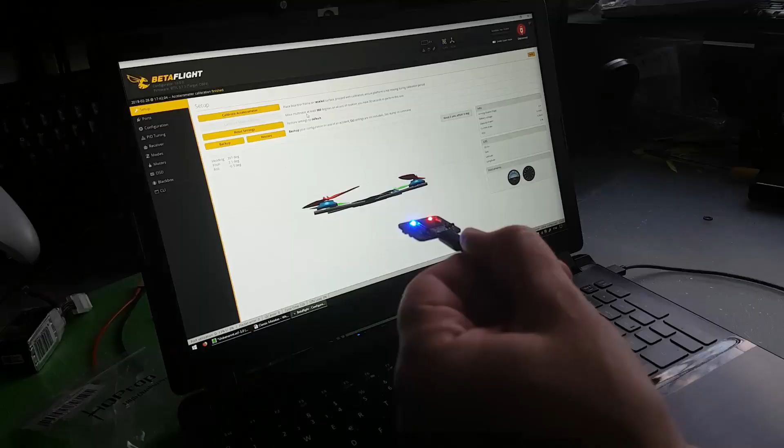Before I start with the build, I just want to make sure the FC is working correctly. Right now I'll begin with an overview of all the components I've used in this build.

I will try a whole series of different propellers. These one to begin with are the HQ props with 3-inch pitch and 4 blades.

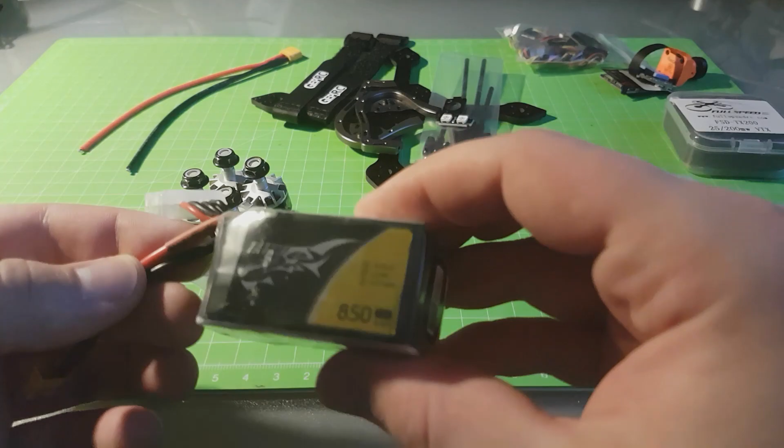These are the two 4S 850 mAh batteries. To connect these batteries I use this little XT30 connectors.

For the drivetrain I chose those Brotherhobby T1 1407 3600 kV motors.

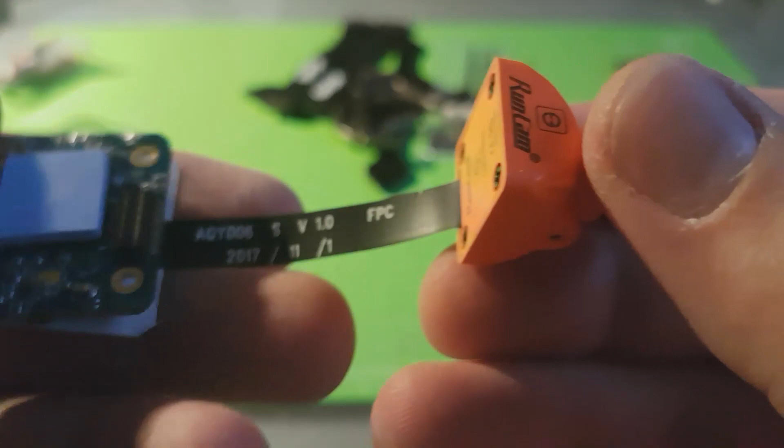The Runcam split mini is the part I'm most excited about. It's capable to record 1080p 60 and send the FPV feed while recording.

This is just a very cheap VTX I chose, the FSD TX200. Should be good enough.

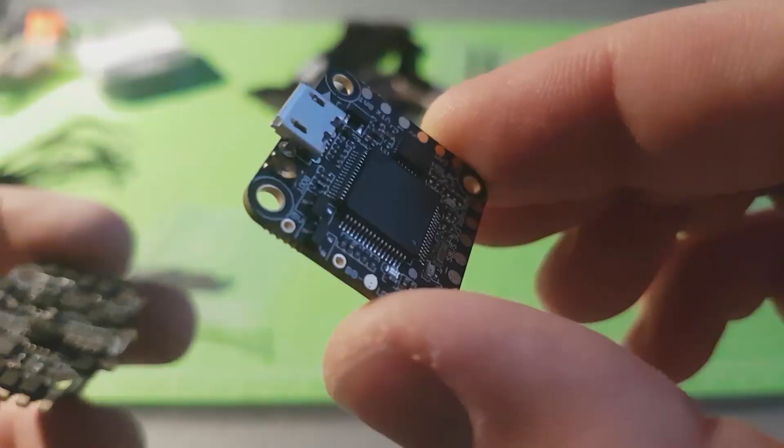For flight controller I chose to use one of those towers from HGLRC. This is basically an F4 flight controller with an integrated OSD and a 4-in-1 25 ampere ESC.

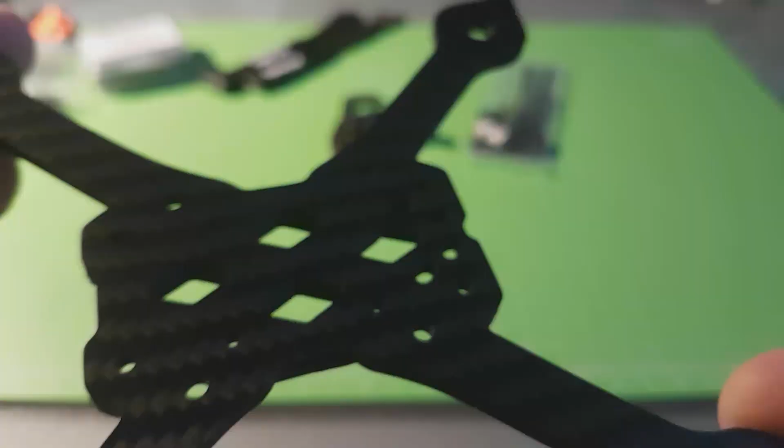The frame I used is, as said before, the GepRC MX3 Sparrow with a motor diagonal of 139mm.

It's always a good idea to start with putting some tin on the ESC connectors.

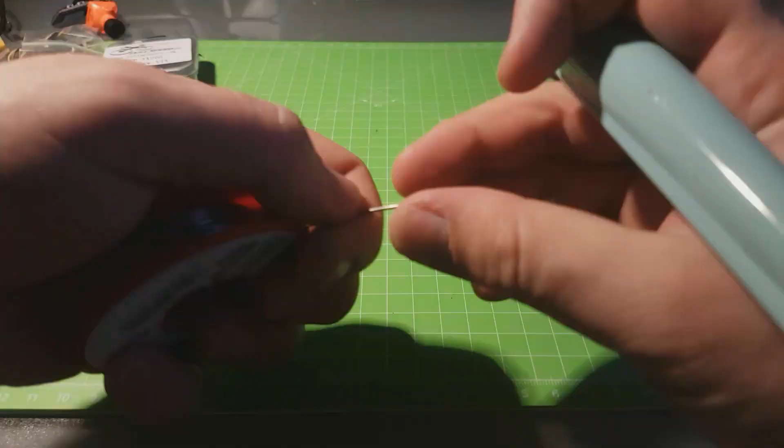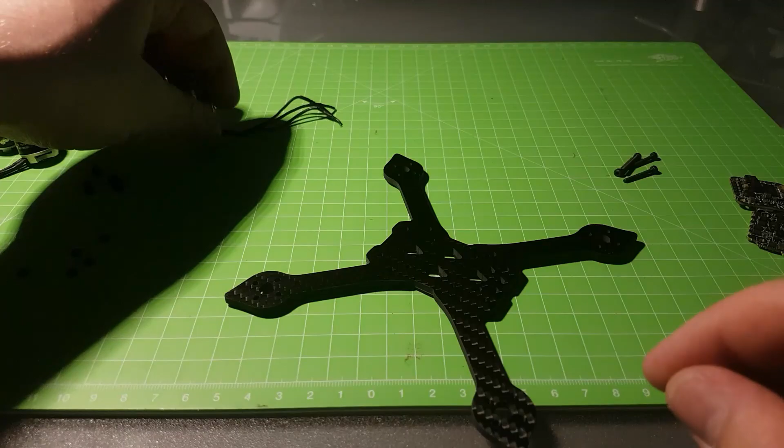After soldering I prepare everything to get the stack on the quadcopter frame. The next thing to do is screwing the motors on the frame.

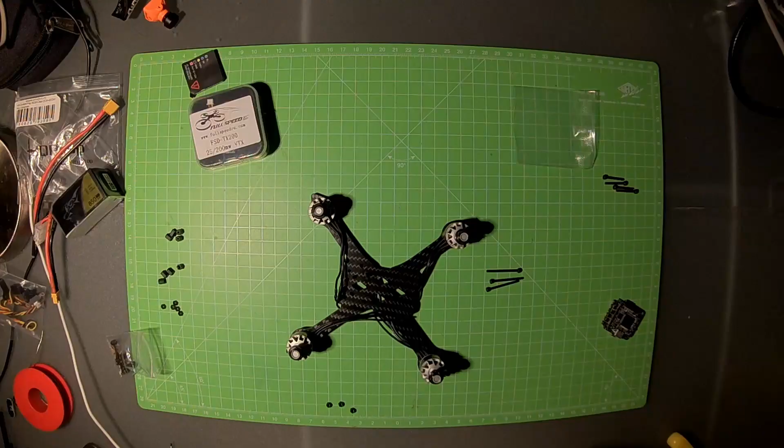With this screws we're holding the FC tower and the Runcam microboards. Hold the screws in place with this nylon nuts.

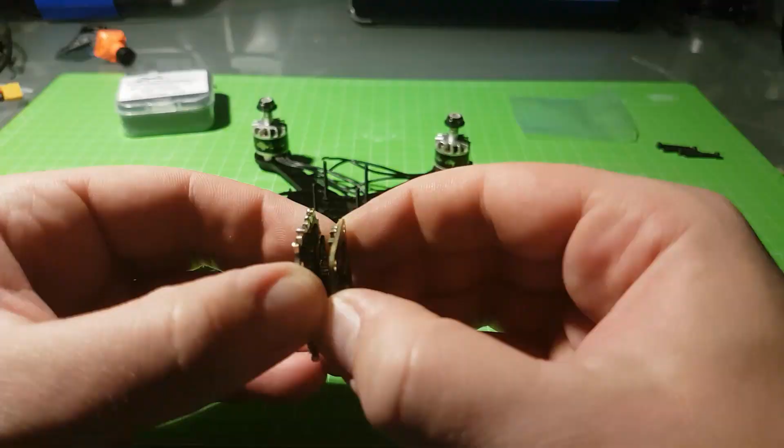When placing the ESC board you have to look out that the motor cables are long enough to reach every ESC pad.

After cutting the motor cables to the correct length, now we have to solder it to the ESC board. Just solder the cables like you want it. We can turn the motor direction afterwards in BLHeliSuite.

Next thing to do is connect all the other motor cables to the ESC pads.

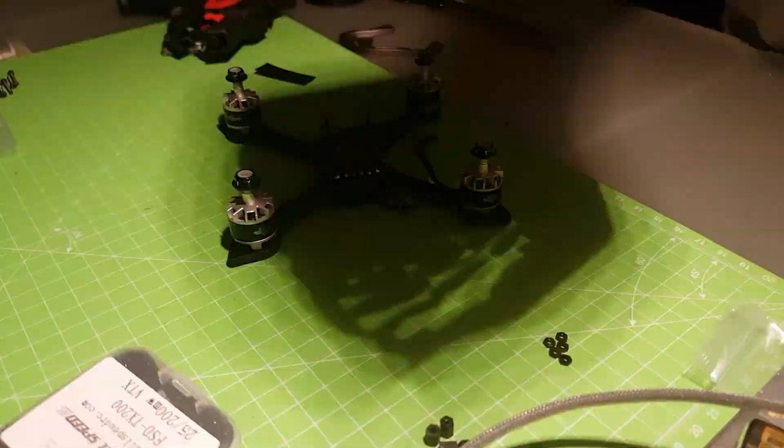Take the correct length for the battery cables and solder them onto the ESC board.

Place the flight controller and set up one part of the aluminium cage.

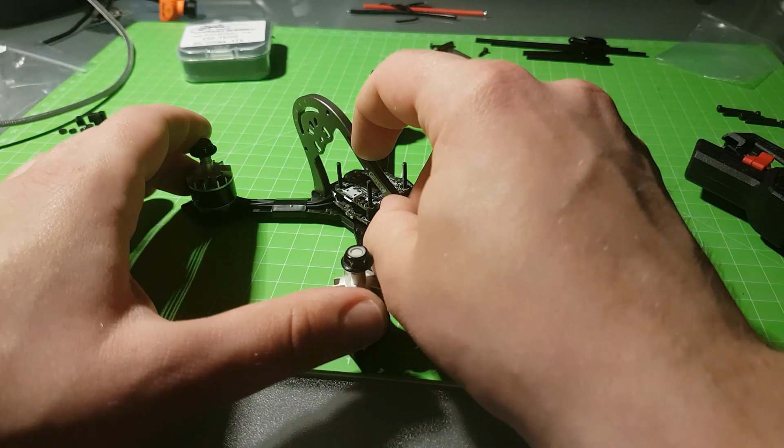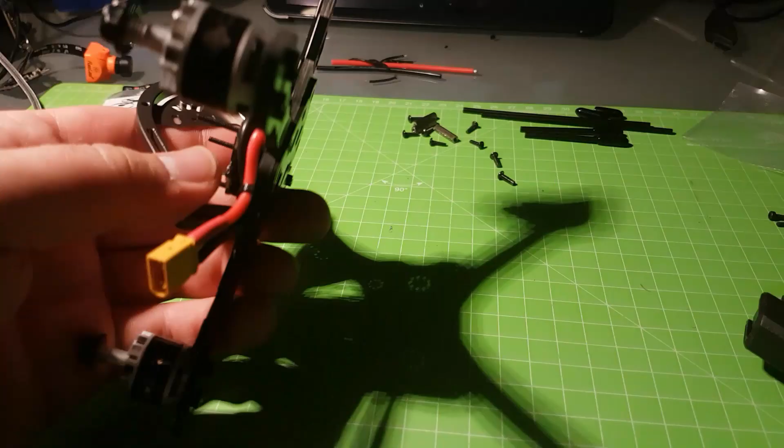Let's lay that quadcopter aside and have a look on the split mini and the VTX we're going to use for that build.

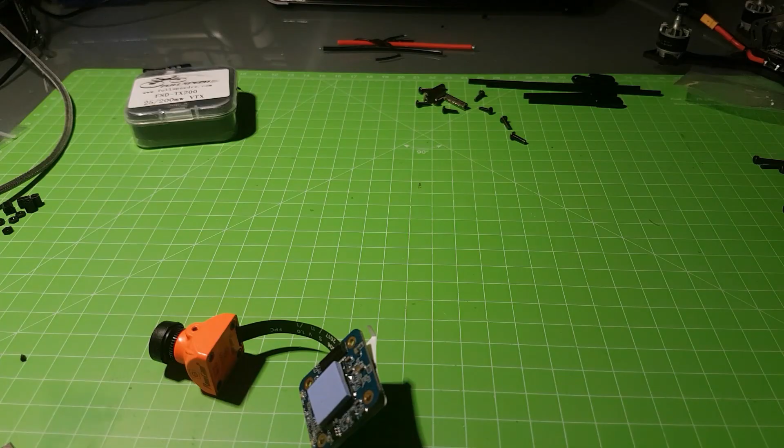The Runcam has its electronics in a stack of two 20x20mm boards. We need to pay attention to the overall stack height, so it fits in the aluminium cage.

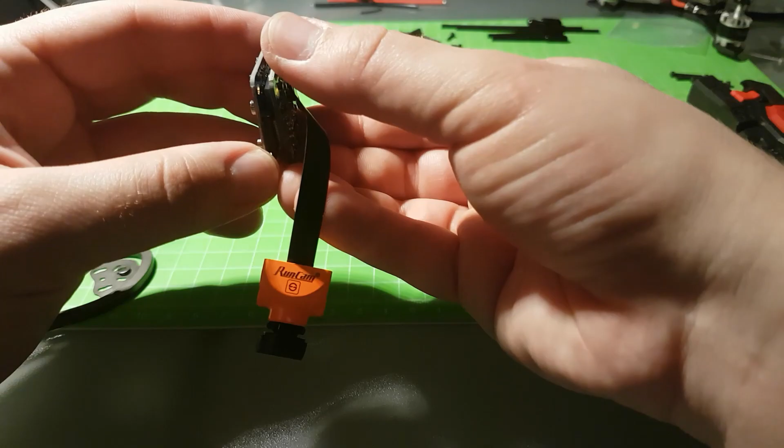The VTX is designed to be screwed on the camera like a backpack. In this case, the holes don't match, so we need another place on the quadcopter.

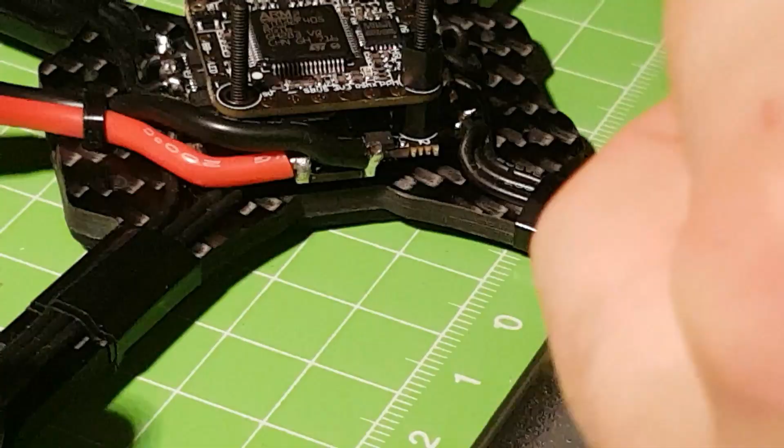VTX takes anything between 5 and 17 volts, so we can solder the positive and negative cables directly to the ESC power output.

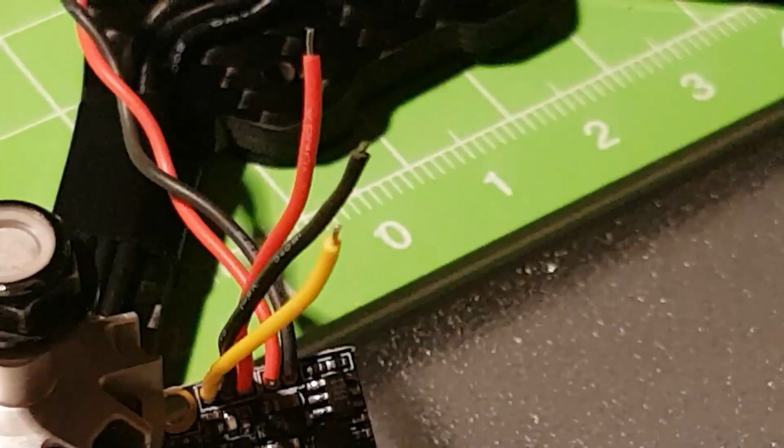We don't need this plug because the cables are directly soldered to the flight controller. Pre-tin the cables and the pads on the FC.

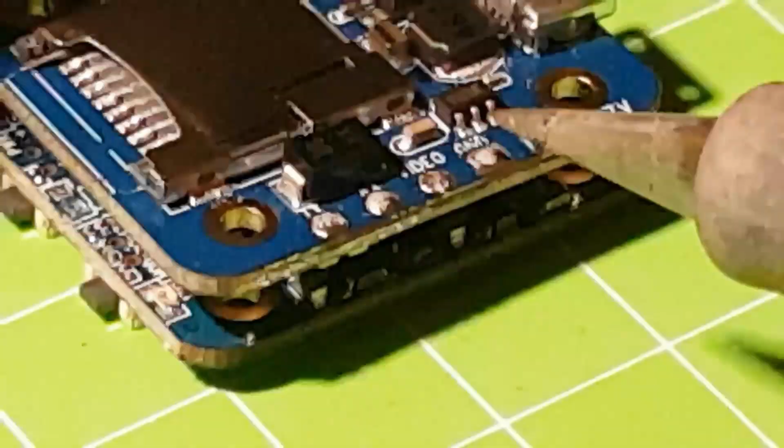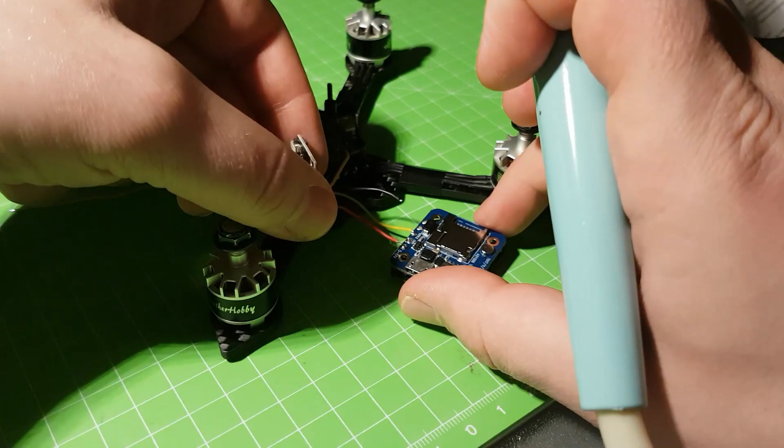Same procedure for the split mini. The power source for the Runcam is the 5V out from the VTX.

Now it's time to connect the LEDs to the flight controller.

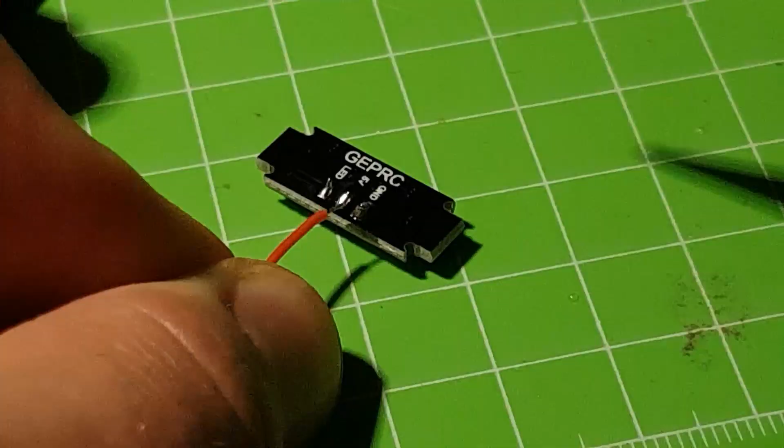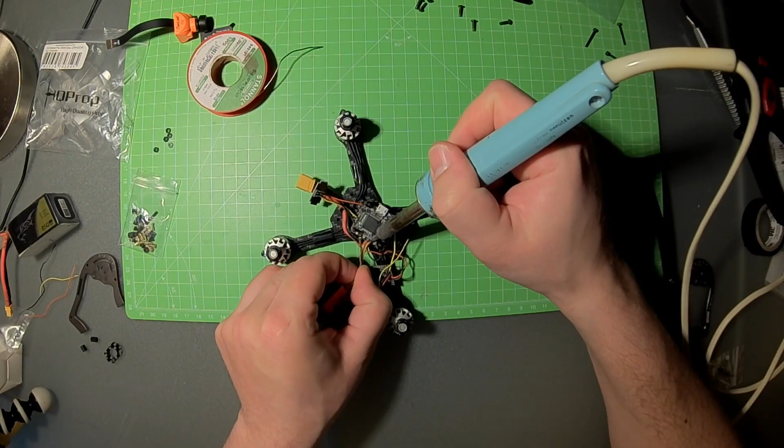All that's left to do is solder the LEDs, the receiver, and the Runcam to the flight controller.

And no magic smoke. Seems like we've done a good job. Before building the cage of the frame, it's time to test all the components.

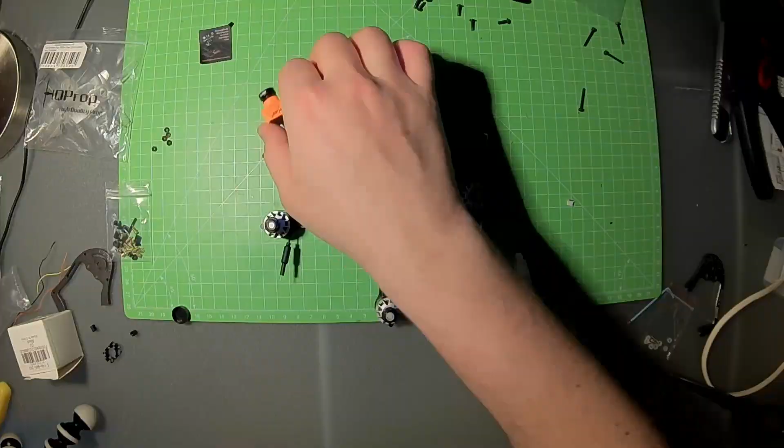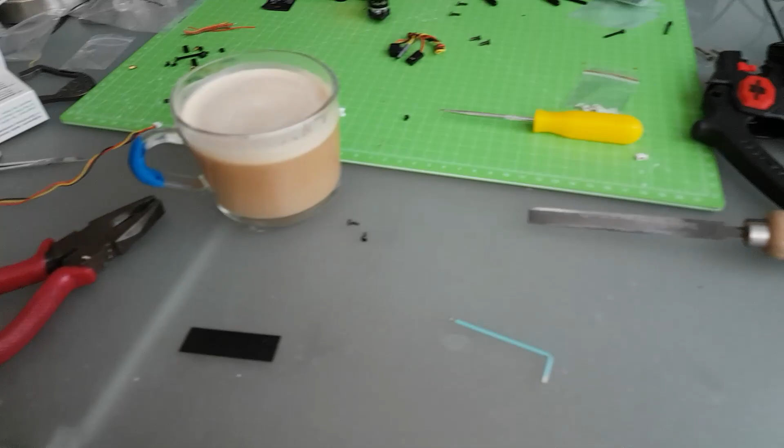I used sticky tape to get the VTX on the quad. I shortened some screws to hold the Runcam in the frame.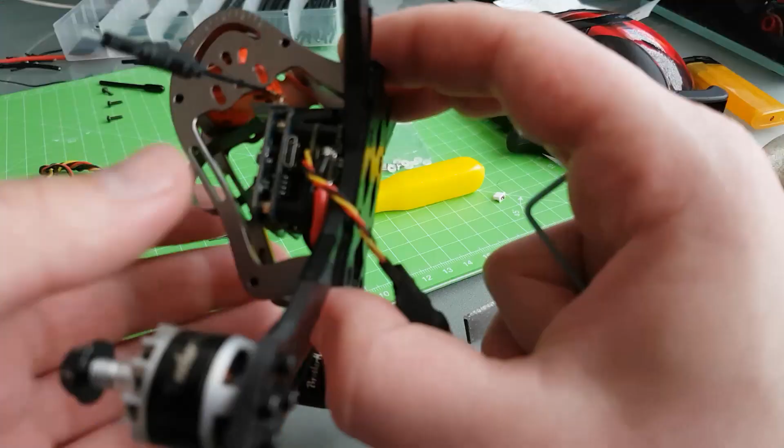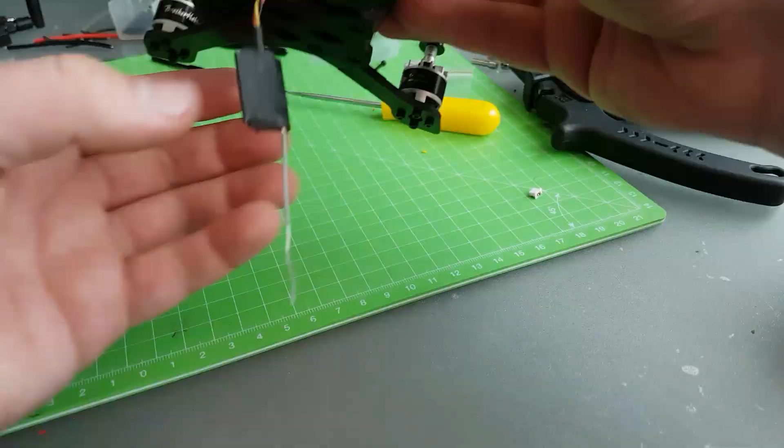I used CA glue to secure the antenna cover. The receiver took its place behind the stack.

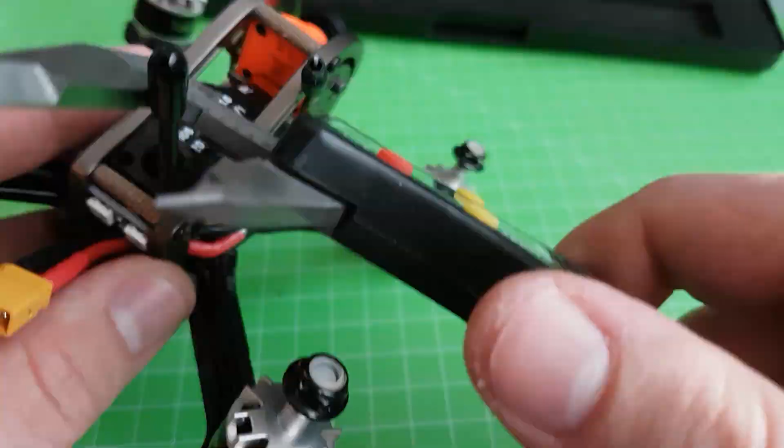I was unhappy with that zip tie holding the antenna, and I thought it would be a good idea to cover the ribbon cable of the camera, so I decided to print something for that problem. I designed a little part that goes right in the slots of the aluminium cage of the frame.

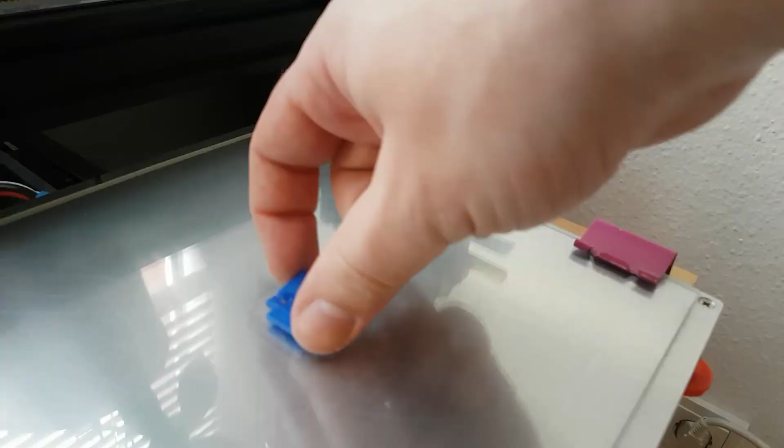Next thing to do is disassemble the quad and test the print. That's a nice snug fit, and we can assemble the quad again.

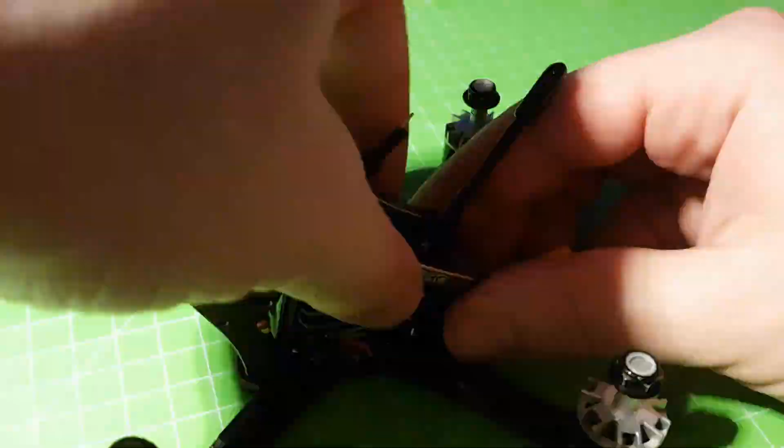The last thing to do in this build is charge the batteries.